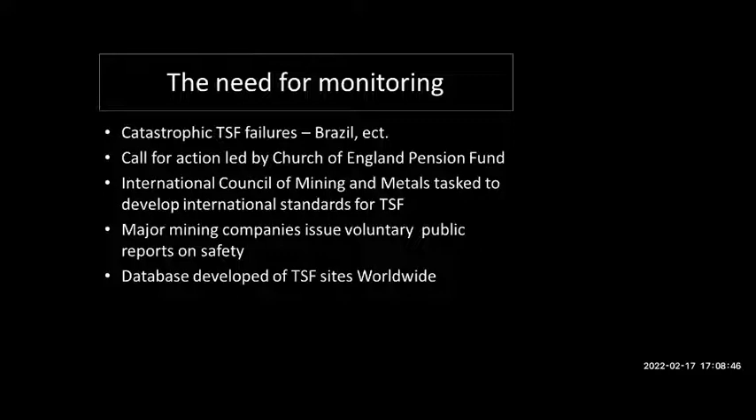Okay, right, so that was the basic background.

Then a whole number of initiatives were undertaken to actually provide the guidance initially, which would then crystallize later into specific legislation and professional codes that need to be adhered to. So on the South African side, the South African Institute of Mining and Metallurgy formed their task group to work on it, and there has been significant work done by them, especially in defining the specific roles and qualifications of the persons carrying the legal liabilities.

And then, of course, this week, the International Council on Mining and Metals published their training material, which is based on the ICMM tailings management good practice guide, during this week actually, so good timing. So when we are now looking at legal liability, we have to look at your construction through operation phase, which is basically then your engineer of record, and that has to be maintained by him, and he carries the responsibility for the full lifetime of your tailings storage facility while in use.

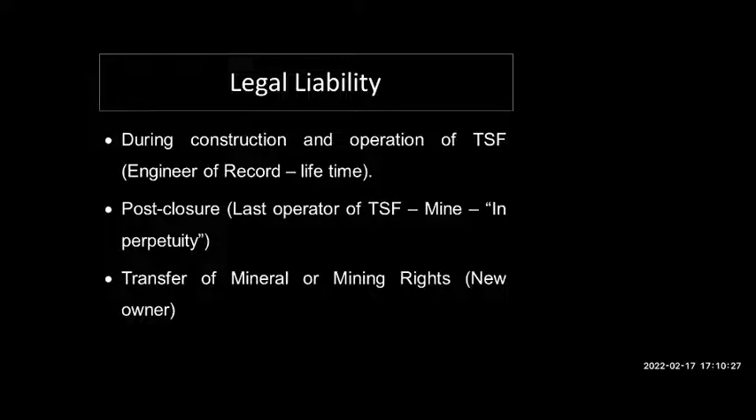Then in the post-closure, specifically looking at the South African context here for this presentation, the last operator is then responsible for the tailings storage facility, in theory in perpetuity, to ensure that the site is actually maintained post-closure. The only difference then is if there is a transfer of a mineral or mining right. For example, if you have processing of your tailings materials, then that liability is transferred to the new owner of your tailings storage facility.

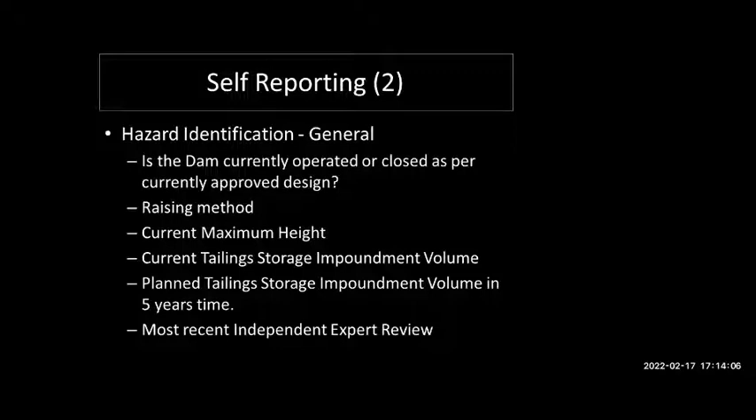So then in terms of your hazard identification, the general questions that came up: is the dam currently operated or closed as per the current approved design? The raising method, so we'll look a bit later at the different raising methods of the embankments. The current maximum height, which speaks to your maximum rate of rise per annum, and then the current storage impoundment volume, as well as the projected impoundment volume within the next 5 years, and then whether or not you have a recent independent expert review, in other words, a third-party review of your documentation and reports that is available for public overview and scrutiny.

Then the due diligence type questions are: do you have full and complete relevant engineering records, including design, construction, operation, maintenance, and/or closure, depending on the status of your specific TSF site? Then what is the hazard categorization of this facility based on the consequence of failure, and what guideline do you follow for the classification system?

So that, for example, in South Africa, that will be SANS, and then you've got your various other districts. For example, you've got specific guidelines and classifications in Australia. In Africa, you've got, for example, Ghana, and in South America, you've got a classification system as well, and other regions in the global setting are also developing specific classification systems for the development and construction of their tailings

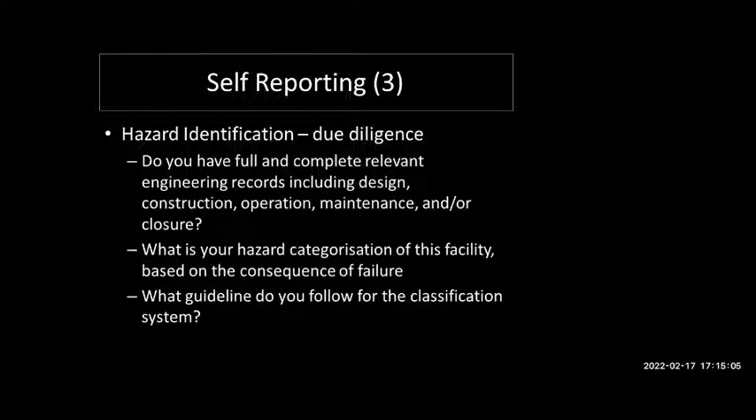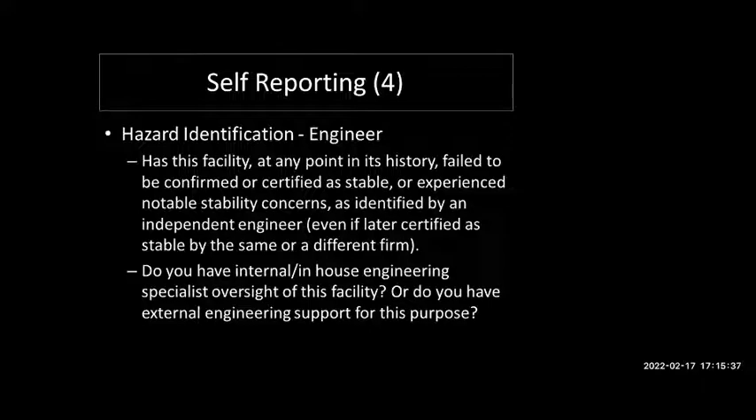storage facilities. So then looking at the engineer itself who takes responsibility for the site, the questions are, has this facility at any point in history failed to be confirmed or certified as stable or experienced notable stability concerns as identified by an independent engineer, even if later certified as stable by the same or a different firm? And then do you have an internal in-house engineering specialist oversight of this facility, or do you have external engineering support for this purpose? All of this always plays into the risk rating at the end of the day.

Then finally, you've got some of your ESG related questions. So has a formal analysis of the downstream impact on communities, ecosystems, and critical infrastructure in the event of catastrophic failure been undertaken, and to reflect final conditions, if so, when did this assessment take place?

So that will be looking at something like your tailings spill path based on your specific volume of your tailings dam within your specific topography based on an elevation model, along with the physical characteristics of the tailings itself, which might affect both formal and informal settlements in the downstream area. And then as well as any seepage that you might have, for example, acid mine drainage, which might also affect your ecosystems surrounding your area.

Then once you get into your final stages of tailings before closure, it's a question again of if you have a closure plan in place for this dam and if it includes long-term monitoring. And then the final question is, have you or do you plan to assess your tailings facility against the impact of more regular extreme weather events as a result of climate change? For example, over the next 2 years, this has now especially been relevant in 2021, 2022, when the southern hemisphere had La Nina weather conditions that were dominating over the area.

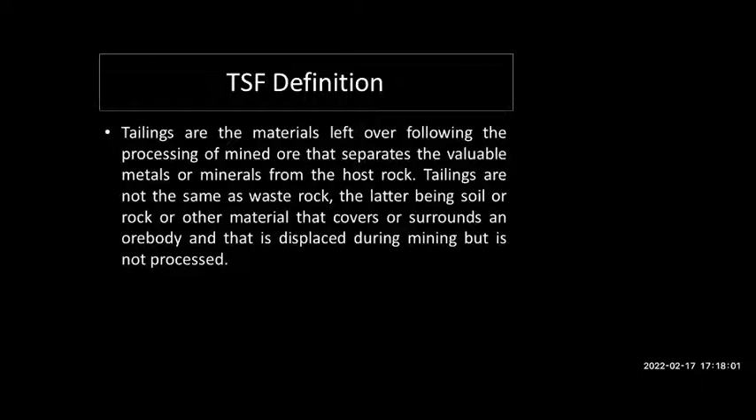So then to give us a very brief overview of the types of tailings storage facilities that you get. So first off, to start, what is tailings? So tailings are the materials left over following the processing of mined ore that separates valuable metals or minerals from the host rock. So tailings are not the same as waste rock, the latter being soil or rock or other material that covers or surrounds an ore body and that is displaced during mining, but which is not processed.

So as you would imagine, the size of your tailings will have an effect on the rate of settlement. So it will have different depositional conditions and stability based on that, based on the angularity of your tailings, as well as your environmental or climatic conditions. For example, an arid region versus a more tropical region in terms of both settlement and potential overweighting of your tailings material as water is seeping through your unconsolidated material down to the level of seepage direction.

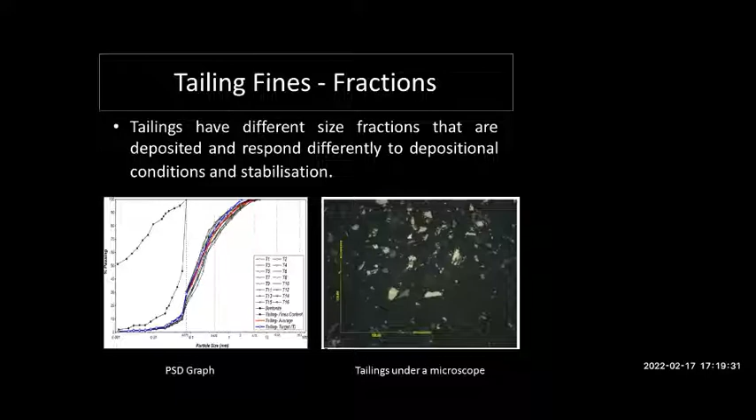So then to just give you a very high level overview of what a tailings storage facility looks like. So we've got different ones, but in principle, most of them remain the same.

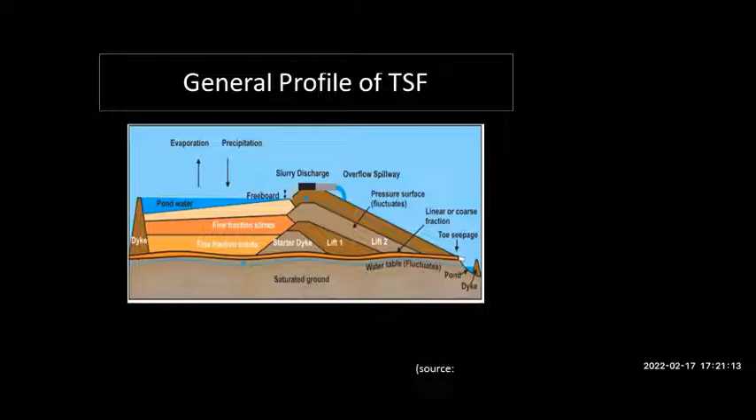So you will always have a preferential deposition from your discharge location to your pond area discharge settlement area in terms of the grain sizes as well, which has a bearing on that. And then we'll look at the other elements a bit further now. So again, using the Anglo-American standard description for the different types of tailings storage facilities which are constructed.

So the number one, which is in terms of hazards, is your upstream construction type, and the upstream has now actually been completely banned by Brazil, and they have set a target to actually remove or recondition all upstream tailings storage facilities within Brazil within the next couple of years. The initial date being set 2022, but then realizing it was a bit overambitious.

So the upstream method basically starts with the construction of a starter dam. The tailings will naturally separate so that coarse material settles closest to the starter dam, while your liquid and fine material settle further away. As the level of the material rises, the crest of the dam is raised on the upstream side, using the support of the previous dam raise and the tailings beach material.

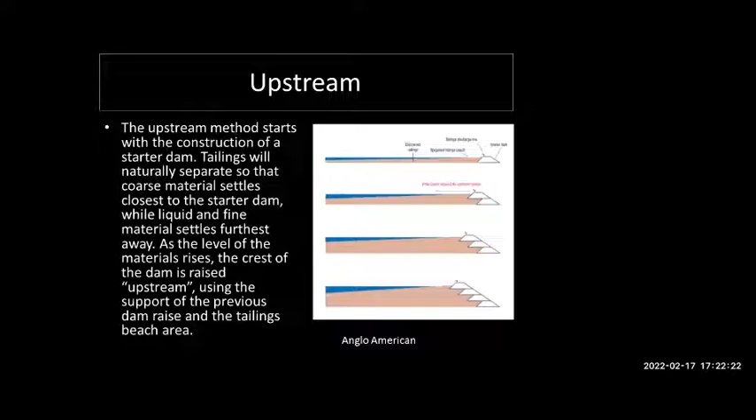So as you can see from that image, each one of these is actually only partially supported by the previous construction and further resting on tailings slurry material underneath it. Then you've got your downstream method. So this is a slightly better method, with the downside that your footprint area for your tailings storage facility actually increases over time.

So it begins in most cases with a starter dam again, like most of your tailings facilities, that has a low permeability zone or liner to control and minimize water loss. In some cases, it also serves to initially store the water for startup of the plant. So all your tailings is then again placed behind the dam, and the embankment is raised by building the new wall on top of the downstream slope of the previous section.

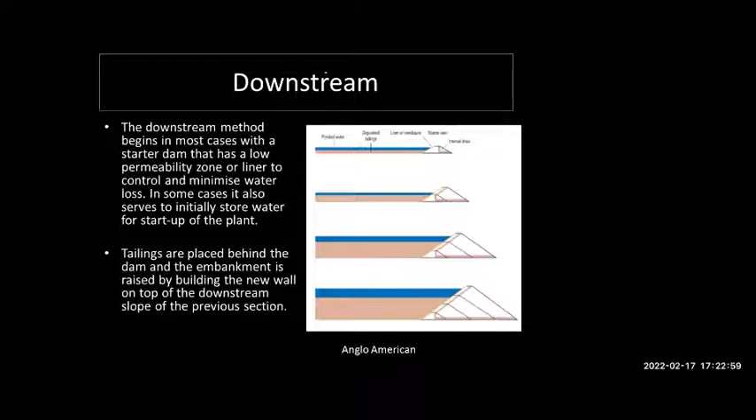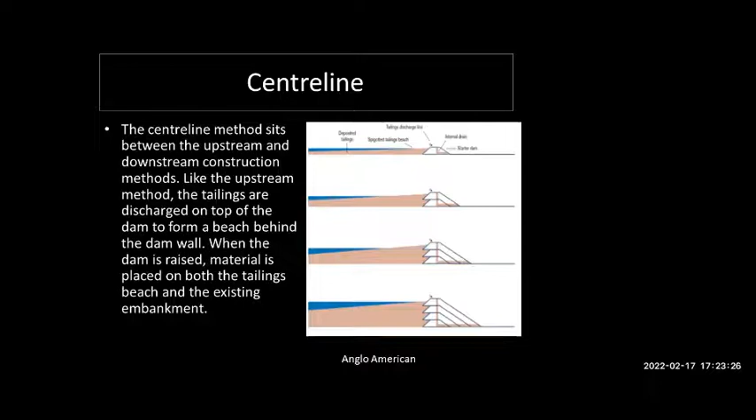Then we go to the centerline one, which is basically stacking on top of one another. So the centerline method sits between the upstream and downstream construction method. Much like the upstream method, the tailings are discharged on top of the dam to form a beach behind the dam wall. When the dam is raised, the material is then placed on both the tailings beach and the existing embankment material.

Then you've got a hybrid, so this is envisaged for especially a lot of your sites now in Brazil, where a hybrid dam is then a combination of different types of previously defined dam types, including downstream, upstream, or centerline, and that changed construction type in the past and is now being defined as a hybrid type.

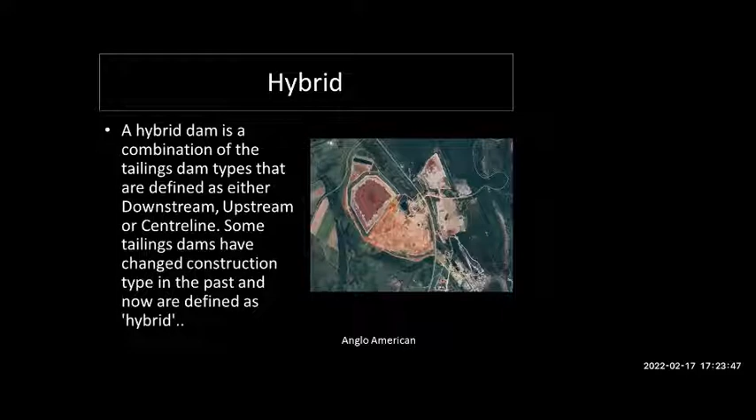Then you've got your landforms. So this is very historic type tailings. So the example I'm showing you here is from the Barberton area. So this is basically a legacy tailings dam that has dried out to the point where it does not constitute a wet dam anymore and is not considered a dam or containment structure at all.

So the main features are the outer wall slopes, which may be altered or flattened by erosion to a point that the facility is unrecognizable in comparison to its previously engineered state. And as you can see here in the example from Barberton, a small village has actually been built on top of that tailings storage facility itself.

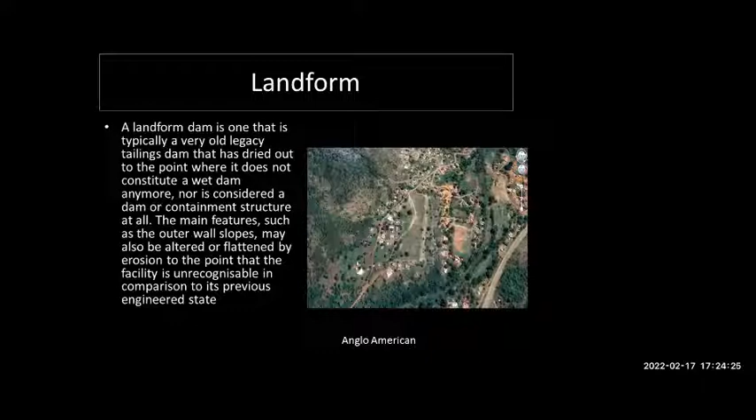with one another. The water retaining structures may have been specifically engineered to have specific structural features, for example, riprap, a low permeability liner, or a core zone, internal filters, and a drainage system to safely manage stored water and seepage flow through the dam body itself. And in a lot of cases, it is built in such a way that it actually capitalizes on the topography of the setting in which it has been placed.

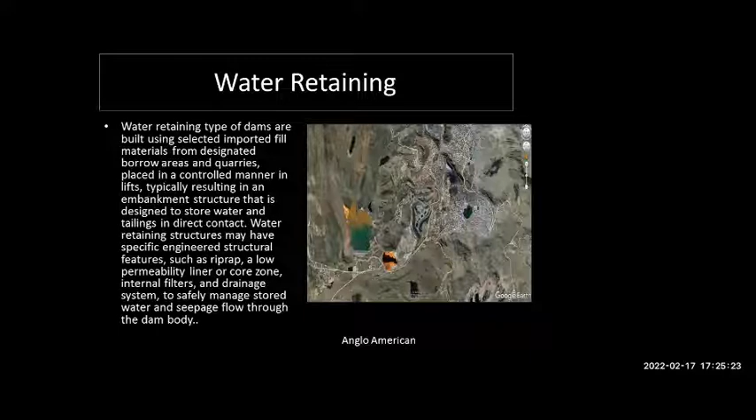So then we will now look at the different failure modes that you get. So as you'll see, I did a quick summary of the main causes of tailings dam failures between 1915 and 2016. So that's looking at a 100-year record. You'll see that overtopping, 44 of them, has been the leading cause, where it's been overflowing.

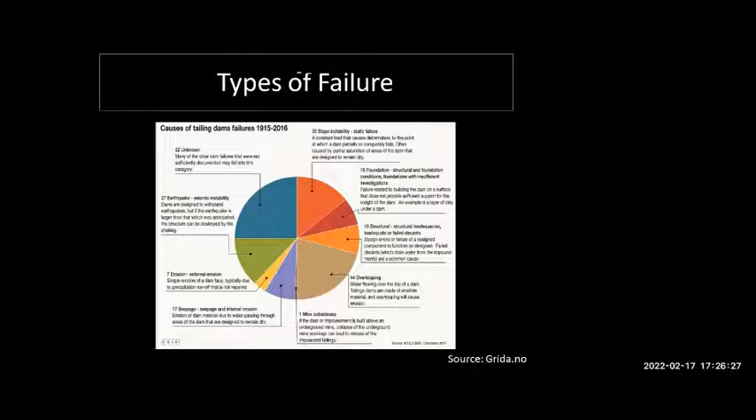And then slope instability, static failure, is also induced by oversaturation of your dam, and then 17 of these are due to seepage and internal erosion. And so as you see, water is the main culprit in these types of settings in terms of failure, which is part of the construction and management process. Then the one that you do not really have control over, 27 of them being earthquakes, i.e. seismic instability of dams. So that actually requires extra engineering to be performed on the dam itself.

Then when we look at seepage now as the main culprit, you've got different types, which are briefly summarized in this graph. So you've got your high water levels due to inadequate drainage facility, mud flows in the event of a dam failure. And then you've got number 2, which is inherent size segregation and layering, producing a deposit with different hydromechanical properties in the vertical and horizontal direction. So again, as I pointed out earlier, we look at the particle size distribution as well as the coarseness and angularity of your tailings being deposited.

And then number 3 is early consolidation results in loose sediment structure, which may collapse during loading in the event of a seismic trigger or dam failure. So this is a liquefaction event of your tailings, which were previously considered stable, but then due to seismic induced activity liquefied again, especially in the presence of water. Then you've got your heavy rains, which cause overtopping, like I mentioned earlier, specifically in Brazil, where you had extreme weather conditions in terms of excessive rain.

And then number 5, you've got your compressible and low permeability fines close to the embankment that reduce your dam stability. Then number 6 is slip along pre-existing weak seams in the foundation, which can lead to global shear failure. This mechanism is aggravated by rapid increases in dam elevation.

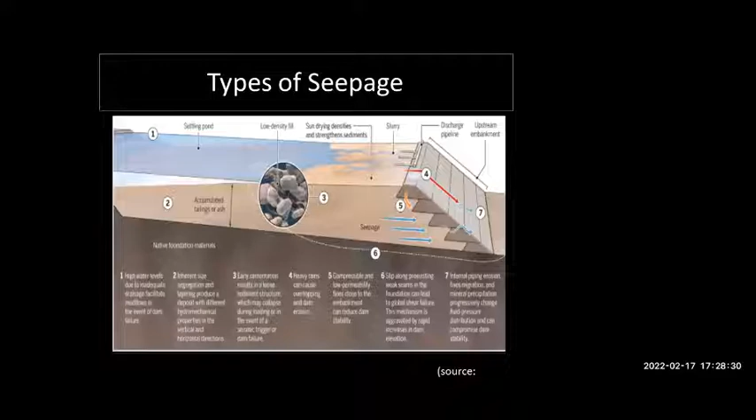And then the final one is looking at the infrastructure along the wall itself, so that's internal piping erosion, fines migration and mineral precipitation that progressively change your fluid pressure distribution and can compromise your dam stability. So this is especially important for the guys doing your daily slurry pumping checks to watch that you do not have compromised infrastructure.

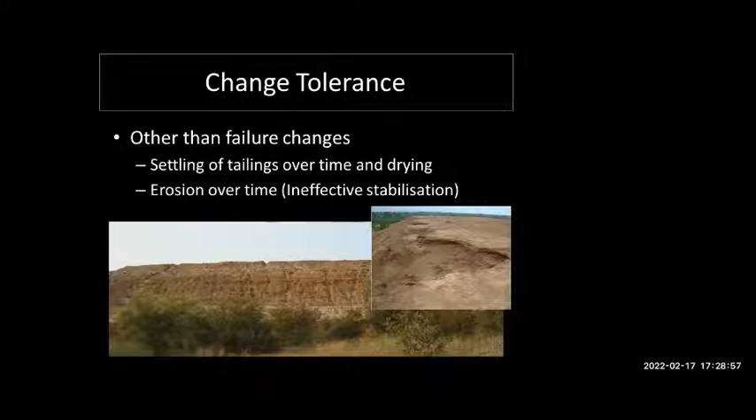So then we also have over time a change tolerance that you look at. So other than failure changes, you've got settling of tailings over time and drying, which you need to account for. And then once you've got your final or maximum rate of rise and you have closure of your tailings facility, you then need to remain cognizant of erosion over time, especially where you have ineffective stabilization of your tailings walls.

So how do we do all of this monitoring? It starts off on site doing manual monitoring. So it's a geotechnical engineer or a geologist in combination with your plant engineer and your mining engineer, along with your management who take responsibility, that report on specific site investigation results. So we start off with a visual inspection and measurements from stationary instruments as well. Then identifying potential indicators of failure.

The downside of that is usually, because it is not a designated task, you sometimes have a rotational engineer or a contractor that comes out at a specifically predefined frequency, for example, quarterly or annually. There is a high cost in having such a person, and then a lack of continuity, especially over a long period of time, if you've got different persons working on it that report findings in different manners, as well as some of your historic material which is not consistently logged.

Then you've got your instrument monitoring, so that gives you a more consistent review of specific elements within your tailings storage facility, which is then reported on. So that relates to pond elevation, the piezometric pressures at your phreatic zone, installed inclinometers, and then finally all of your meteorological data, for example, a small meteorological station installed next to the tailings storage facility to just keep tabs on what is going on there.

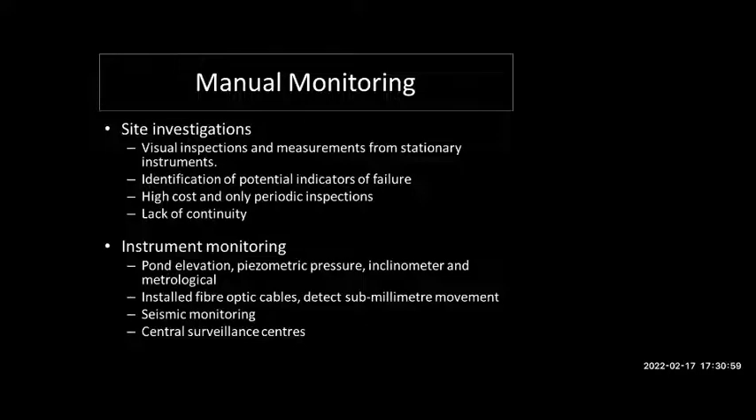Then you've got your installed fiber optic cables, which are able to detect sub-millimeter movement, along with seismic monitoring, which is a passive method that is used. And then you've got your central surveillance centers, to which all of the information is collated. So let's start at the start.

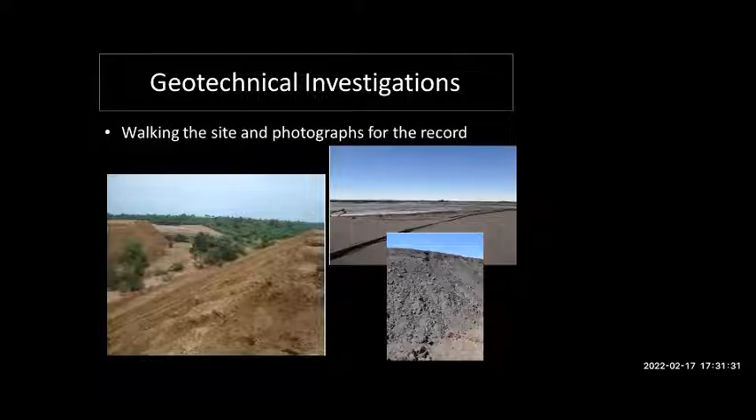So when the geotechnical engineer arrives on site, he usually does a walkabout around the tailings storage facility, looking at specific sites of the tailings storage facility, usually critical areas which have predefined risks associated with them. So all of that is then captured into a photo database. So we've got a photo record in terms of the development and closure of your dam over time.

So when you've got your clipboard, or nowadays you've got your Surface with specific entries that you do for your area. So walking along the crest or inspecting the crest, you note the current elevation and then the reservoir level or the remaining freeboard that is measured on top. Then distance to the tailings pond. Then looking for any surface cracking.

So the surface cracking is specifically related to subsidence of the tailings storage facility wall itself and not just desiccation cracking. Looking for any unexpected settlements that would usually be expressed as something like a little sinkhole, anywhere where you can note a lateral movement or any other unusual conditions that you might pick up while doing the inspection.

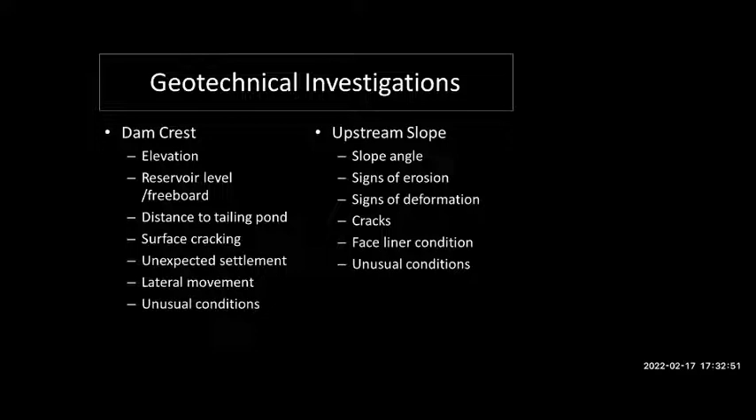Then you look at your upstream slope where you record your slope angle, any signs of erosion, signs of deformation, again, further cracks which might be related to your deformation or settlement, again, not just desiccation cracking, and then your face liner condition along with any other unusual conditions which you might observe.

Then you go down to your downstream slope side, and again you note your slope angle along with any possible erosion, movement, cracks, seepage or wet areas, because this is where your ponding of water takes place. Then vegetation growth, which may serve as a proxy for seepage which is not visible, along with any other unusual conditions which might be noted.

Then you can look at your downstream toe areas. So there you look again for seepage from the dam itself, along with erosion. So when you look at the seepage itself, and you can see actual turbidity, so in other words, you can see physical flow in that seepage, that needs to be marked as a high priority.

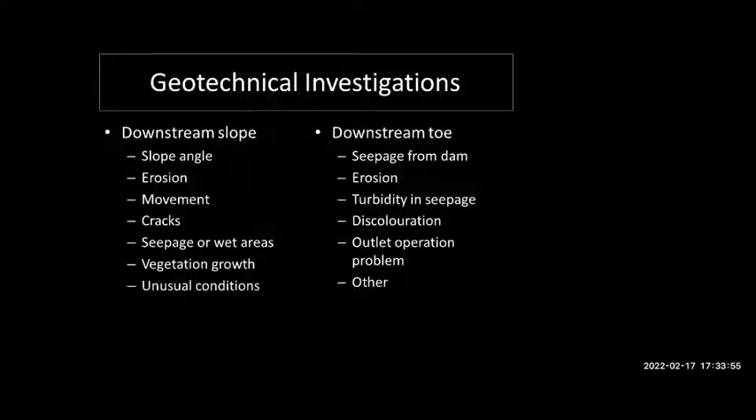Along with discoloration, so you've got migration of elements, which, when it makes contact with the atmosphere, oxidizes and results in discoloration on the side of your tailings storage facility. And then outlet operation problems which might be noted and then reported to the relevant engineer, along with any other notes.

Then shortly you will go to the abutment area, where you will note your seepage at the contact zone itself. Again, any possible erosion that you might have, excessive vegetation, again, excessive vegetation being a proxy for seepage which is not visible, and then rodent burrows. So this is actually more related to your infrastructure.

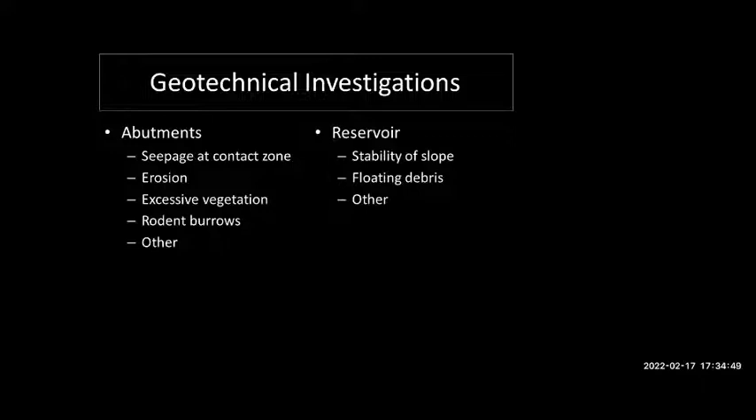So you've got things like porcupines and so on, which can either smell or hear flow in pipes, and then claw and gnaw at the pipes themselves, along with any other types of anomalous material which you can note. Then finally, looking at your reservoir area, you again look at the stability of your slope around the reservoir, and note any floating debris which might be present in the reservoir itself.

And then finally, you've got your vibrating wire piezometer, so that measures the water level at your phreatic zone, again over time, which you then use for your annual inspection reporting periods.

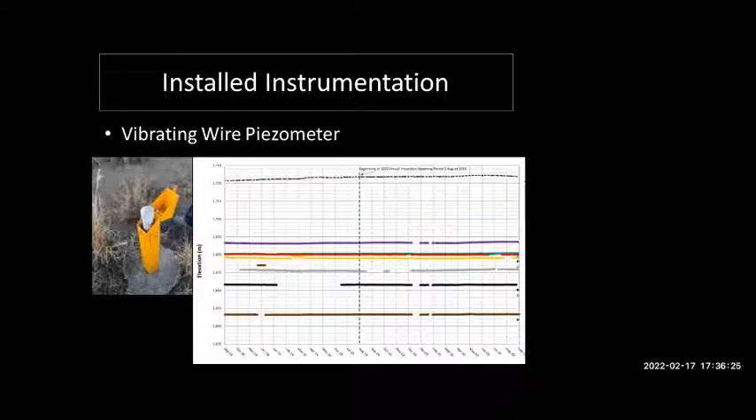Then other potential methods that are being used for passive monitoring. A lot of these are still in proof of concept phases. So you've got your passive seismic, which uses ambient noise to image the interior of the tailings dam. This technique identifies the phreatic surface levels within the dam and is then used to identify any potential soft or unconsolidated zones.

Then you also have your fiber optic sensing, installed in the tailings dam itself, and that provides you with near real-time monitoring of strain, deformation, and seepage. A lot of these fiber optic sensing systems are linked to a satellite communication network, which allows the data to be communicated in near real time to a central monitoring station, where alerts can then be generated in terms of potential catastrophic failure of tailings storage facilities.

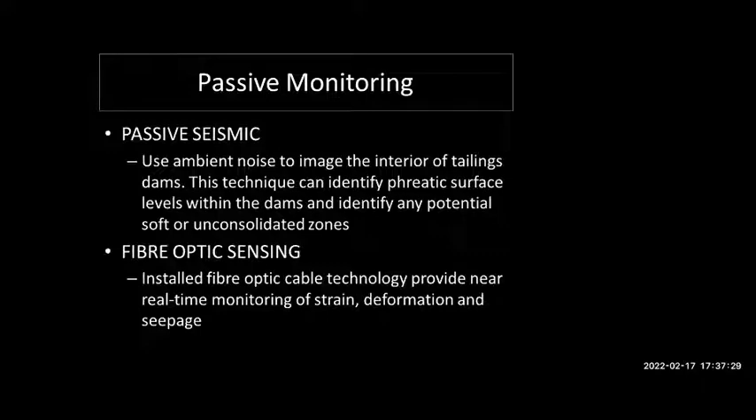So in the last couple of years, drones have become more and more popular to do all of your tailings surveys along with your normal site investigations. It has a couple of advantages. It allows you to access dangerous sites with minimal risk to the staff in the area, which might previously not have been able to be investigated. The cameras mounted on the drones give you fairly high resolution imagery, and you have the flexibility of a multitude of sensors that can be mounted on your drone.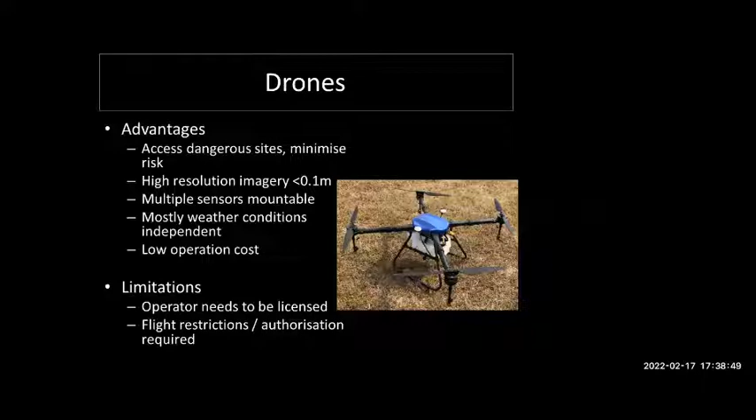Drones can also be used in almost any type of weather condition; they're not barred by, for example, overcast weather, but are limited when you've got heavy winds and heavy rains. And the biggest upside has been the low operation cost. There are, however, a couple of limitations. Operators need to be licensed in order to operate drones on site, and depending on the jurisdiction where the tailings storage facility is located, you have either flight restrictions on drones, or you need authorization to be obtained prior to undertaking any of your drone-based surveys.

So the main applications for your drones are monitoring and surveillance of the tailings storage facility and related infrastructure using high-resolution photography and video that can be replayed after the drone has landed, and it can be used to do wet spot detection using thermal imagery. Tailings water will always be slightly hotter than your ambient environment or any of your other groundwater sources.

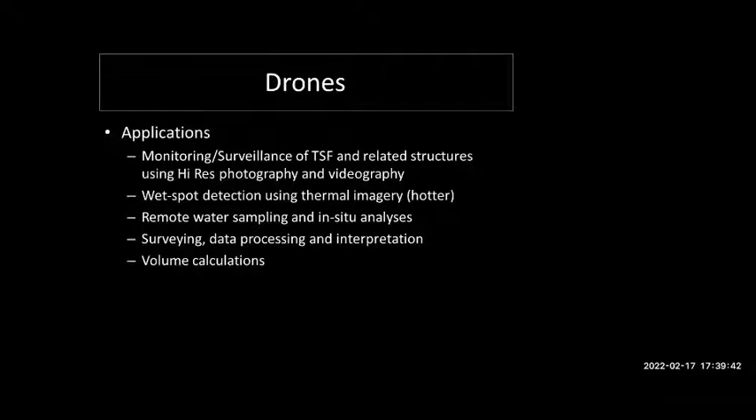Then it allows you to do remote water sampling along with in situ analysis, and you can do surveying, data processing, and interpretation of that data, which is then fed to your survey department. And it also allows you to do volume calculations for reporting, or if you have potential reprocessing that you want to do.

Then a couple of companies have been developing dashboards. That's usually a web-based application. Your site staff will have a smartphone or a tablet which they use to do entries at specific points. That is then either fed directly to the system if they've got a Wi-Fi connection, or it can be stored temporarily on the device itself and then downloaded as a burst download once they have connectivity again.

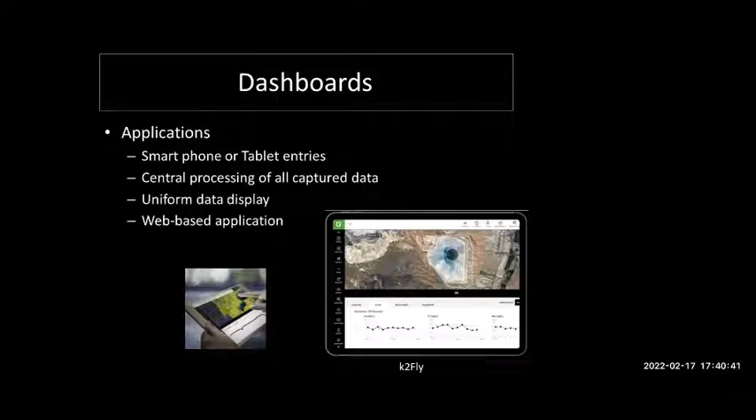All of that information is then sent to a central processing site where the data is captured and ingested to produce a uniform data display and all of your value-added products, allowing someone like your legally responsible person along with your mine management to have all of the results at their fingertips in case they need to make a quick decision.

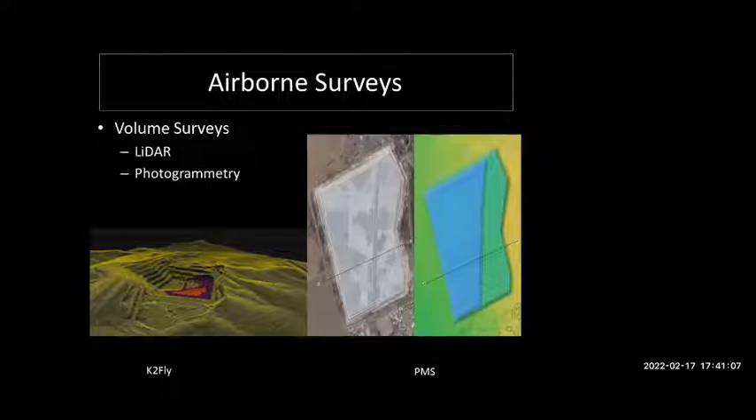So then moving up a bit further in the sky, we've got our airborne survey. That's usually with airplanes that fly over, and they can do either a LiDAR survey of the area, which produces a point cloud map like shown on the left-hand side, or they can do conventional stereo photography, which is then used through photogrammetry to produce your volume calculations.

And then when we leave Earth's atmosphere, we've got a couple of satellite platforms that you can also use to monitor your tailings storage facility. You have the option of two types of platforms. The first one is your public domain satellite imagery, which is made available through government organizations.

The upside is that it's usually free to obtain within a couple of hours of being made available. The downside is it's got a fairly low resolution, and you cannot specify your area of interest, which means you might not get your full tailings storage site within a single pass, and then you might need to do mosaicing and all of the related downside that actually goes with not getting it in a single pass.

Which relates into your long repeat pass intervals. So it takes a couple of weeks sometimes before a public domain satellite passes over the same area again, and you get both optical and synthetic aperture radar data, which is made available online.

When you've got your commercial suppliers, the downside here is it's a fairly high cost to task a satellite to actually do an acquisition over your area of interest. The upside is that it is usually very high resolution that you do get from it, and you are able to specify your area of interest, so you get the entire area in a single pass potentially. And then you can program it for a specific date of acquisition, so that might fall in line with what you are doing in terms of your surveying mark updates.

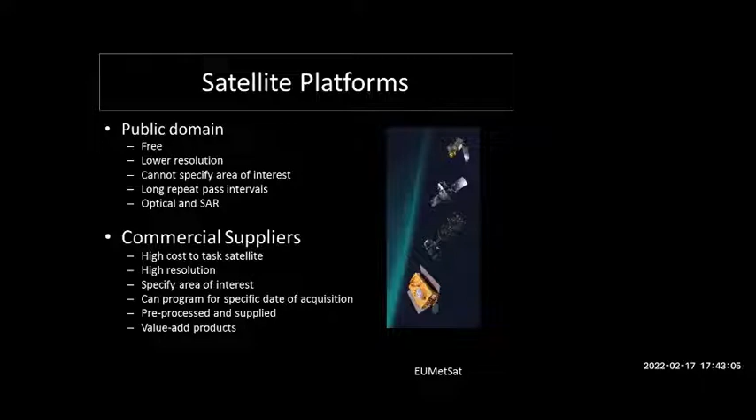Some of these suppliers also do pre-processing before the imaging is supplied to you, and then you are able to instantly either get from them or generate value-add products for your tailings storage facility. So looking at your optical side, you've got your electro-optical, so you've got a range of visual bands, so that's red, green, blue, and near-infrared, and then hyperspectral bands, for example, SWIR, which is made available to you. Depending on the different bands you've got in your optical image itself, it will determine the type of outputs that you can generate later as a value-add product.

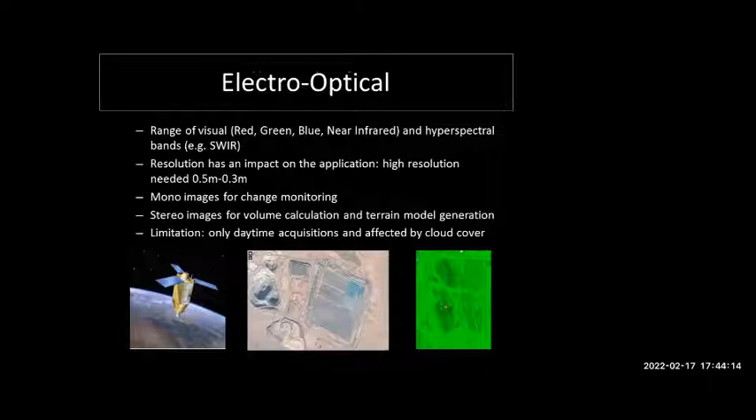So for a tailings storage facility, it's better to actually have a high-resolution image. Right now, commercial platforms are offering 50 centimeter and 30 centimeter resolution optical images. You will usually acquire a mono image if you are only interested in doing change monitoring, for example, vegetation changes or surface water changes over time. And then you need to do stereo imaging if you want to do volume product calculations or generate a terrain model. There are a couple of limitations with these platforms. You are limited to doing daytime acquisitions, and a lot of this is affected by cloud coverage itself.

So the main applications for optical imagery is then pond management. You've got your surface water area that can be detected, but not water depth. You can do monitoring of your tailings beach width, for example, to prevent an overtopping event by redlining it. And then looking at your post-event monitoring, for example, if an overtopping event or spill event occurred, you can actually do monitoring of the area while you're still waiting for other services to be able to access the area itself. And then over the long term, you can do weathering and erosion impact tracking of your tailings storage facility.

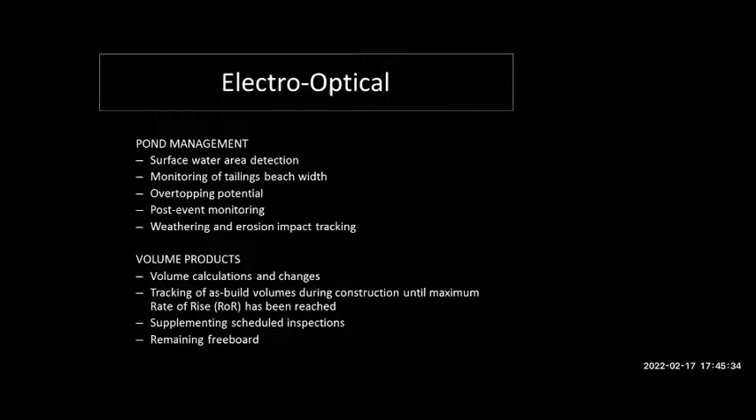Then the other one, which is very important, is your volume product. It can calculate both volume as well as volume changes. You can then use it to track as-built volume during construction until you reach the maximum rate of rise. And then you can supplement all of your scheduled inspections. So in between your quarterly or annual or semi-annual inspections, you can still obtain imagery, which you can then scrutinize in terms of potential changes on site. And if you've got a volume product, you can also do a high-level remaining freeboard calculation.

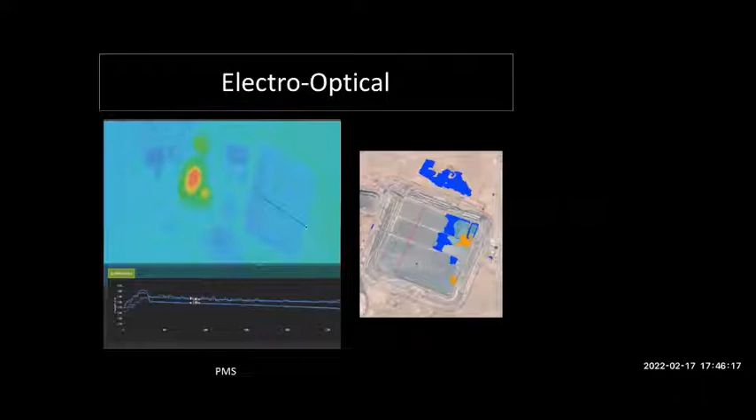Then we move over to synthetic aperture radar. So that's basically where you can now start using interferometry. So that uses phase differences between acquisitions to detect surface deformation on your tailings storage facility. The advantage is that this data can be collected both day and night and is not affected by cloud cover.

It is especially used then in the equator areas or any other of your areas where you have potentially persistent cloud cover. There is, however, a limitation in terms of the application over very active tailings storage facility sites due to very dynamic changes. And then, of course, if you've got very large surface water areas which cover the top of your tailings storage facility, or if you've got very dense vegetation in proximity to your tailings storage facility.

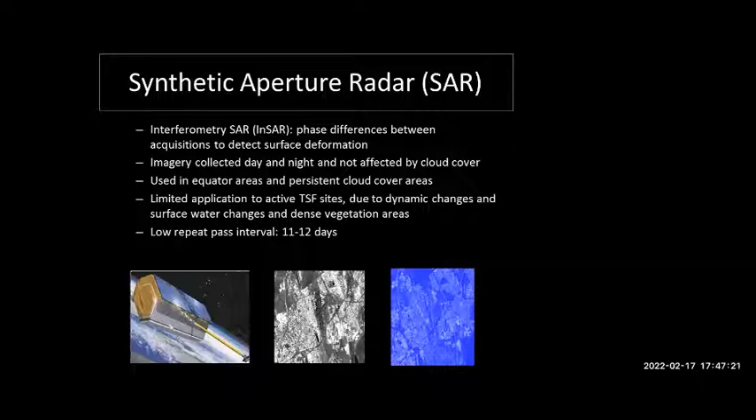And again, you've got a fairly low repeat pass interval, anywhere between 11 and 12 days, which limits your potential to actually do real-time monitoring with satellites at this moment for any of your tailings storage facility. So the main application here is surface movement monitoring, or SMM as it's more commonly referred to. So you are able to do detection of vertical movement, i.e. subsidence of around 2 millimeters to 5 millimeters.

Then depending on the constellation you are using, you can have only a single line of sight observation over your area, or you can have an ascending and descending pass over your area of interest. If you only have line of sight, then you will still be able to do a vertical movement interpretation. And if you have both ascending and descending passes, not only will you then be able to do a vertical movement delineation, but also infer horizontal movement. But you do again have the limitation where you potentially have obscured sides depending on the orientation of your tailings storage facility.

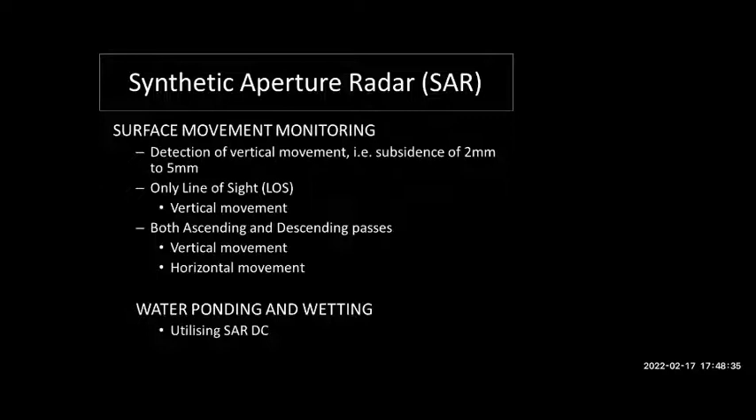And then in terms of, like we indicated earlier, water being the main culprit in some of your failures. So you want to look at water ponding as well as wetting of your tailings. So that's usually using SAR DC, with a company in Cape Town having done fairly groundbreaking work in using that approach in terms then of generating potential alerts of failure.

Then when we look at the different outputs that you do get from InSAR type monitoring, you can do either point monitoring, along line monitoring, or a specific area of monitoring. The outputs usually are then velocity and displacement. So the most common industry method of using this output to delineate the potential of a failure and to generate an alert is using your inverse velocity graph. So that's expressing then the days per millimeter over days.

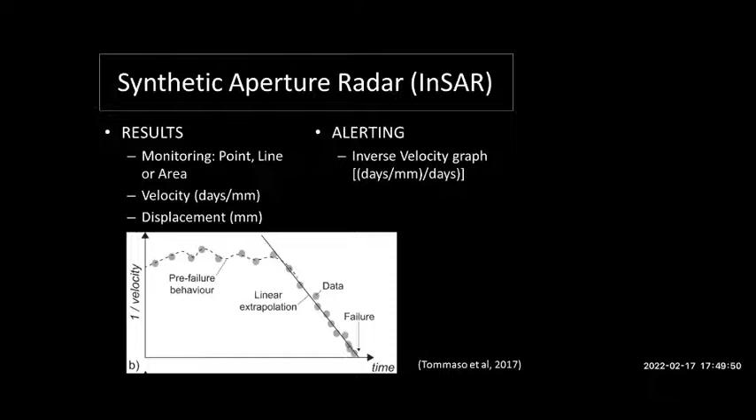So you can see from the graph itself, you've got your pre-failure behavior there, and then you've got an inflection point. Then by extrapolating those data points until you reach the 0, you can then indicate a potential date of failure or amount of time until failure, which might allow you sufficient time to put remedial measures or catastrophic prevention or evacuation measures in place for communities affected by potential spillage.

Then you also have your persistent scatterer interferometry or PSI points. So those are points which are expressed along the walls of your tailings storage facility. Then using your displacement intervals, your mine will usually indicate to you a specific subsidence which is within their tolerance levels, which they expect it to actually be annually. And then you've got different category intervals in terms of risk for potential failure of a subsidence which exceeds that tolerance level.

In this specific case, all of your green points are points that have remained fairly stable between acquisitions. And then as your colors become hotter, moving from yellow, orange to red, it then gives you the ability to delineate a specific point where you might have a potential failure event.

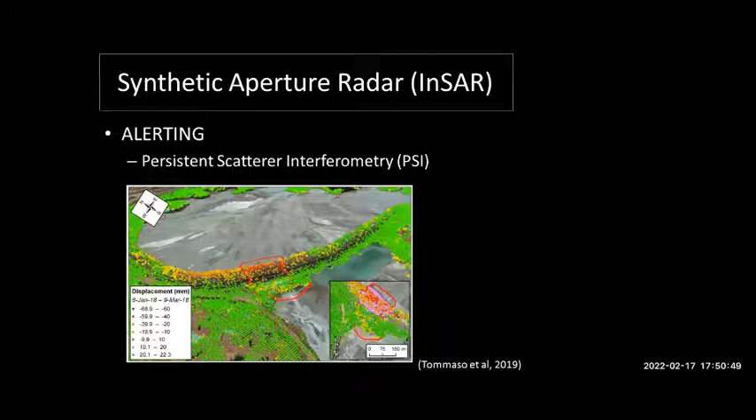So basically moving then into the last section of what we are presenting: what are the different phases that you do your monitoring in, and what do you do during those phases? So site planning and preparation. So that's using your digital elevation model or your DSM or DTM that you obtain. That is used then for the placement of the tailings storage facility along with all of the associated infrastructure, and modeling of the topography for designs of your retaining walls.

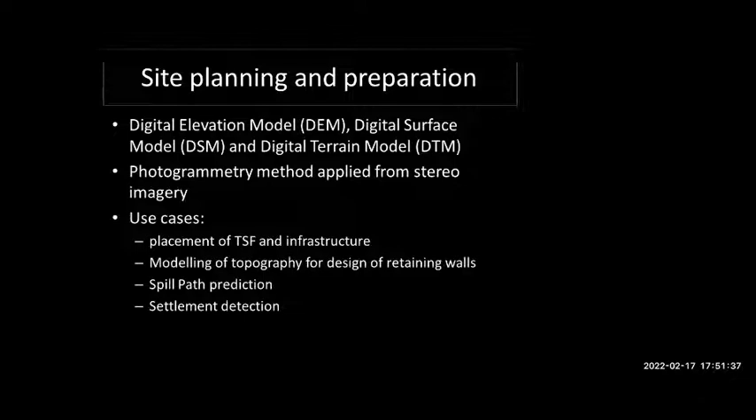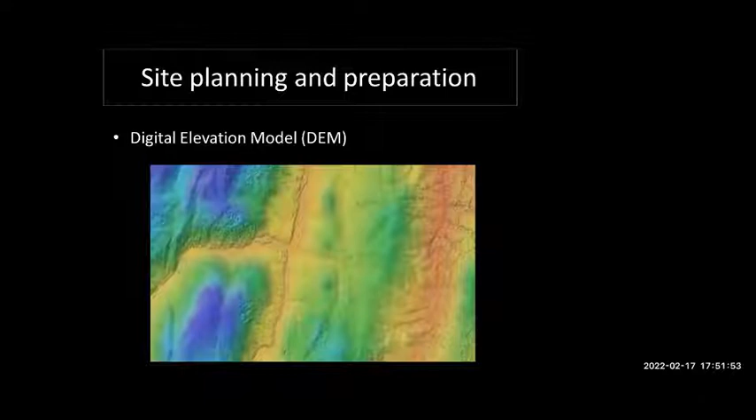It can also then be used in terms of your regional hydrogeology studies. It can be used in terms of your spill path prediction that you can set up, and then any potential settlement detection within that area that will be affected by it. So this is basically what a digital elevation model will look like, and it will define to you specific areas where you will have the flow path of potential spillages along with potential development in terms of regional hydrogeology.

Then during the construction phase, all of the monitoring is usually done by the survey and project management departments. So you will be looking at your volume product, so that is your monthly quality assurance, and your check as-built surveys that are being performed.

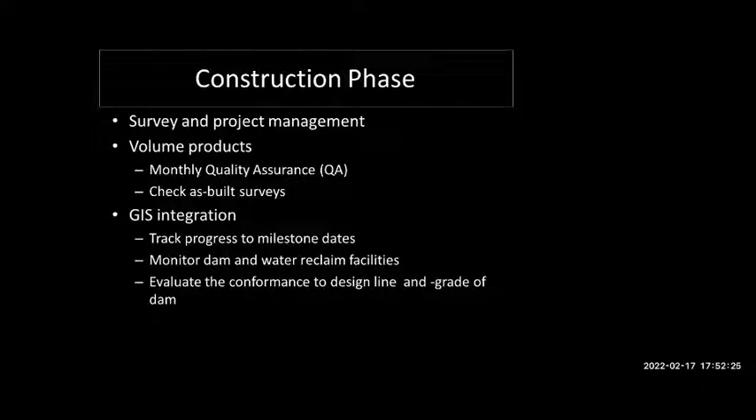And when you do all of your GIS integration, that would be tracking the progress to milestone dates, monitoring dam and water reclaim facilities, and then evaluating the conformance to the design line and/or grade of your dam as it's being constructed.

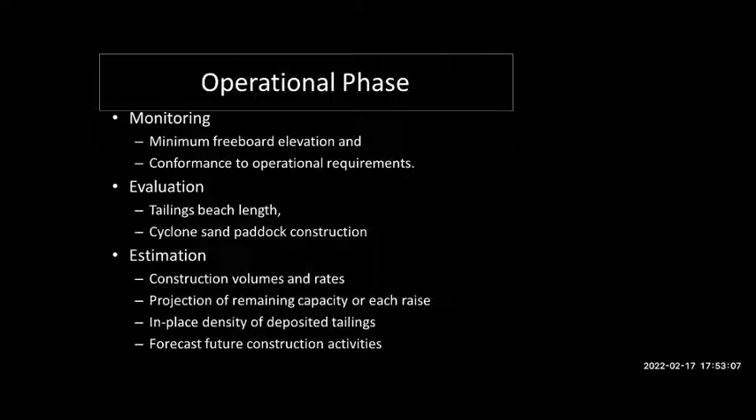During the operational phase, your main monitoring activity relates to your minimum freeboard elevation and the conformance to your operational requirements. Then you will also do evaluations of your tailings beach length along with your cyclone sand paddock construction. And it allows you to do a number of estimations relating to your construction volumes and rates, your projection of remaining capacity for each raise, your in-place density of deposited tailings, and then forecasting future construction activities based on all of these inputs.

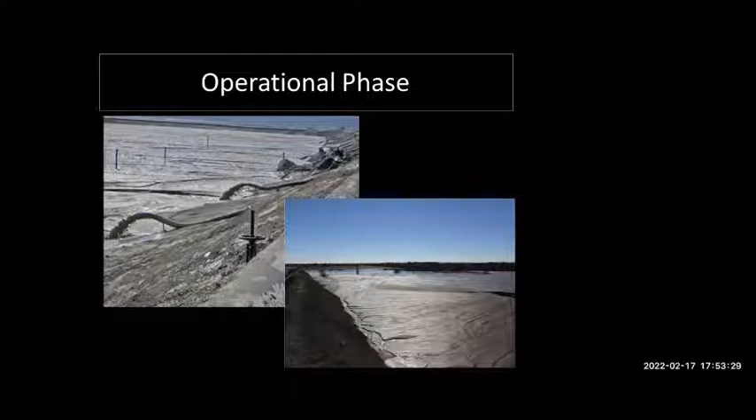Then an important function, as mentioned a bit earlier, is your pond management, where you have both plant-derived tailings and meteorologically derived precipitation water, which then ponds in your tailings storage facility. It's one of your main safety considerations, especially for overtopping, and it also gives you a proxy effectiveness indicator of reclaiming water by your plant. Then by redlining your tailings beach area, it gives you a warning if the areal extent of certain parameters is exceeded in terms of your surface water area, and then triggers an alert for overtopping.

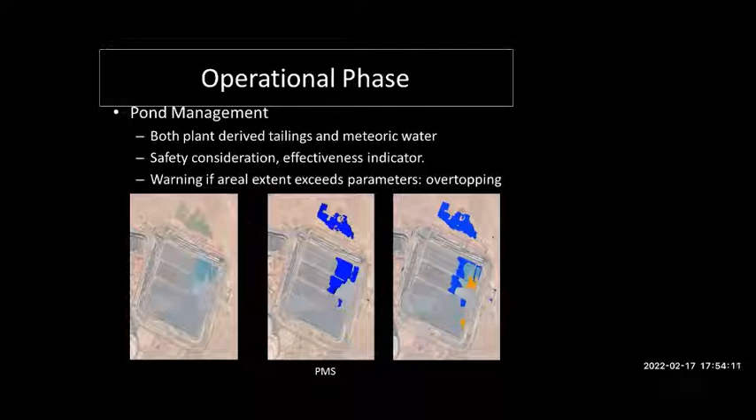Then, after you've reached the end of life, the final rate of rise, you've got your post-closure phase. So now you are basically going into security mode. You're looking at infrastructure stripping or vandalism going on around your tailings storage facility, as well as keeping tabs on any illegal mining or reprocessing that's taking place on site.

And then finally, your rehabilitation, where you look at, for example, the success of vegetation re-establishment. So planting of, in this case, black wattles to help stabilize the walls and the top of the tailings storage facility, and then keeping tabs on other environmental processes that could also negatively affect it. For example, potential acid mine drainage.

There you can again use your drones to do thermal imaging and use, for example, SAR to delineate your overwetting of tailings material, and then finally you can use your NDVIs as a proxy when you've got your optical visual bands to determine where you've got dying plant material, which might then indicate potential acid mine drainage within your area.

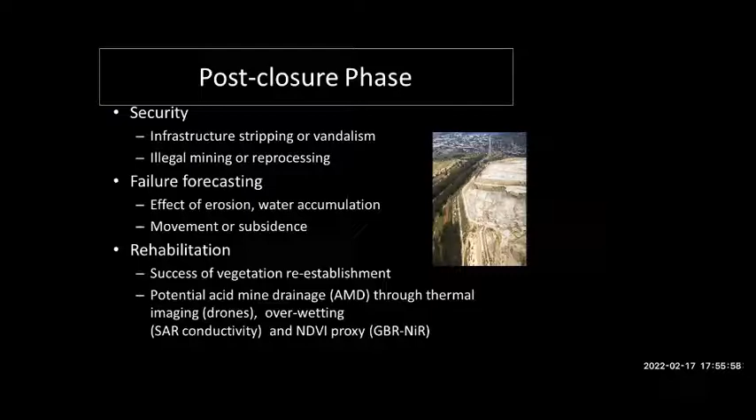There's a couple of questions so far in the Q&A boxes, but before we go to those, perhaps I'll just pick up on something in your penultimate slide: you said planting black wattles to stabilize dams. Surely those are invasive aliens, and the environmentalists are trying to get rid of them, not plant more of them. Yeah, I was just referring to a specific image there, but you are correct. Depending on the region, in Australia and so on, they can use black wattles. You've had invasive black wattles, especially if you drive along the N1, you'll see some of those old tailings with a lot of black wattles on them, but you are correct, that is actually an invasive species. Until we find a specific grass or an indigenous shrub, they'll stay there.

Are they particularly good at binding because of their water uptake and that sort of thing? Well, basically they are fairly resilient plants, from what I've read, so they can actually withstand toxins within the tailings storage facility, and like you say, a lot of these Australian plants, the black wattle and the blue gums, do absorb a lot of water as well. Okay, thank you for that.